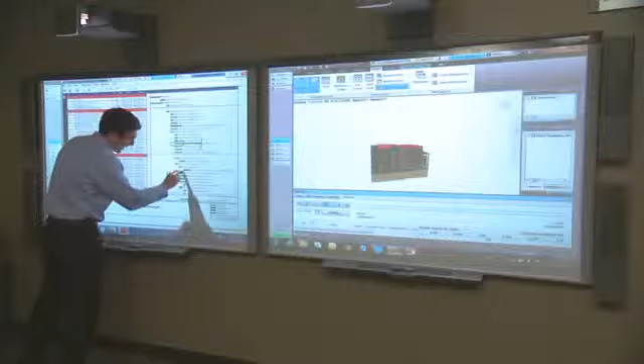We don't want surprises on a construction project. If you have a surprise, normally it means a schedule delay and a cost delay. So we're trying to build digitally first, and we're really trying to look for issues as part of our process before we get out into the field, because it costs a lot more money with schedule delays and everything like that.

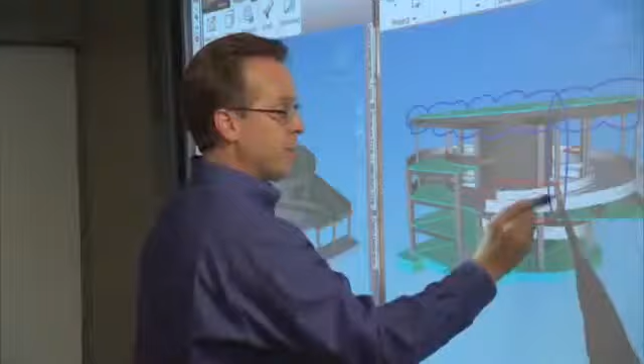BIM, Building Information Modeling, is building 3D models to help facilitate whether it be estimating, constructability, actual construction at the job site, or facilities management models for an owner.

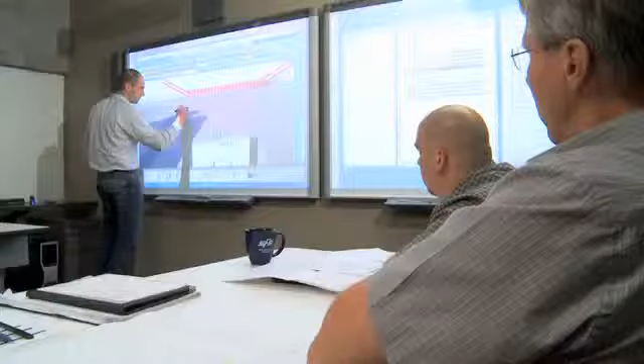A big part of building information modeling is the collaboration that occurs within the team. This collaboration is allowed to occur because of smart technologies and because of the software. When people walk into the BIM room, they kind of know that they're coming to a collaboration session. Whether that's collaborating in the same room by standing up in front of the room and marking up a smartboard, marking up our BIM model from the smartboard, or it's collaborating with someone 3,000 miles away across the country.

You go into the BIM room to coordinate, to hold meetings, to collaborate with folks online via the Bridgit server, and really just have a collaborative way of interacting with the project team.

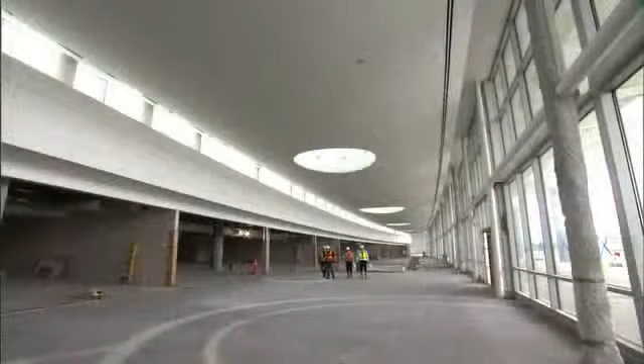Turner is building a consolidated rental car facility for SeaTac Airport. The ceiling of the rental car facility, where the desks are, is shaped like a boat. And for the subcontractors to visualize where their work was going to fit in, there's skylights up in the ceiling, fire protection lines, duct work, electrical, as well as some seismic restraints.

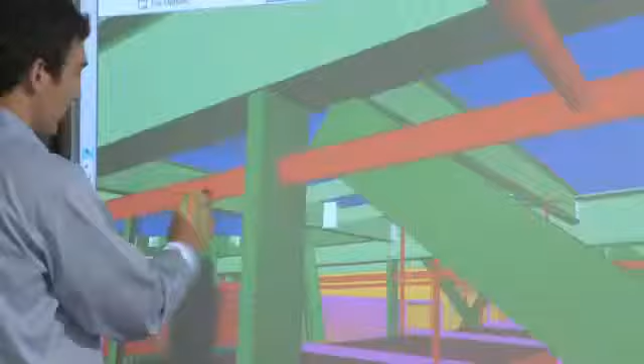People were having a hard time visualizing whether or not their work would actually fit into the ceiling. We had an issue with the metal framing and the diagonal braces, and then the limitation we had left with the fire protection. We got down so tight with the smart boards that we actually figured out how to run the fire protection in the studs themselves.

It's up 30 feet in the air. Once you're up there, taking things apart is not easy, and you more than likely would change it, you'd have to go do it again and again. You could see it a lot easier on the 3D than you could after the fact.

The rental car facility happened at the same time as there was a downturn in the economy, and that project actually was at risk of being shut down completely. So for us to do some value engineering on the job, to give them the same kind of product at a savings, was a huge issue.

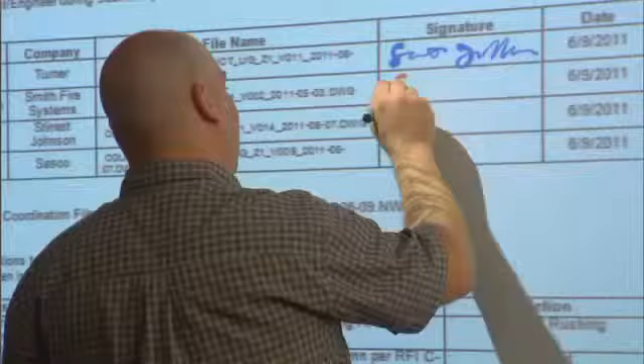The smart solutions have really become just an integrated part of our process. We did a study over a number of our projects using BIM and not using BIM, using technology and not using technology, and the mechanical trade alone, just from coordination and clash detection, became over 100% more productive.

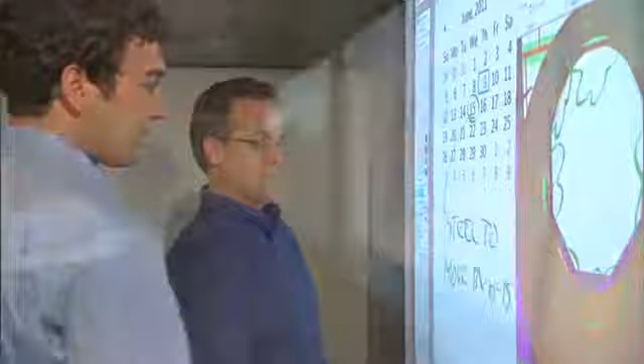We really embrace the innovation and the technology as a company, and bringing that to our buildings just helps us build better buildings, because that's what we like to do.